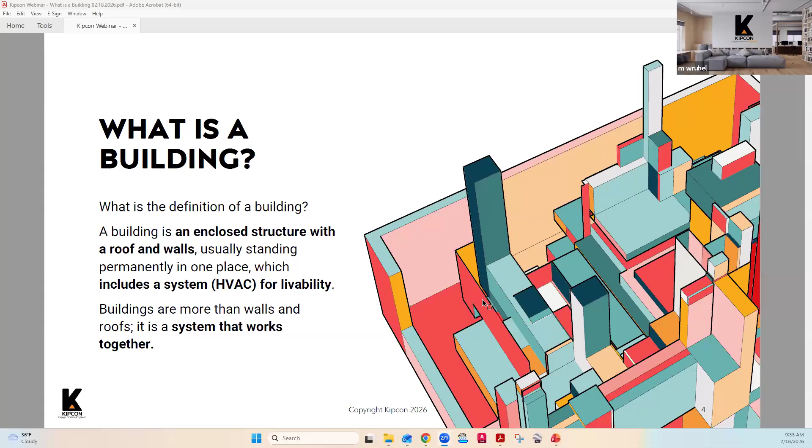Humans have been building buildings of all types for a very long time now. In the modern age, we have modern materials that perform differently. We have ways of conditioning the air in our homes in the past 50 to 100 years or so that are much different than the way we've done things in the past, and there are certain requirements those systems have to run efficiently. The components of the building all work together.

Starting from the bottom, you have a foundation. In this particular picture, this is a section—if you were to take the front facade off of the building and look at what's inside in terms of its actual structure, you'll see there are footings sunk into the soil. There are all different kinds of footings. Some buildings are on piers that go many feet into the ground. Some buildings have basements underneath in which the foundation walls are much larger, and there is a below-grade occupied area or area that can be entered.

In this particular building, there is what would be known as a crawl space. You've got frost footings, meaning the footings extend below grade. Depending on where you are in the country—here in New Jersey and Pennsylvania—you want those frost footings to go at least 3 feet below the ground so they are bearing on soil that is not susceptible to freeze-thaw. Those footings extend above the ground, and then the framed structure is constructed on top of that.

In our example here, we have a wood frame structure, and the exterior walls form the basis for the structural components of that building. Sometimes, based on the building configuration, there may be load-bearing walls inside that structure that you can't get rid of—they're part of what holds up the structure. The roof is also structural in that it's framed out in such a way to hold that shape. Some buildings have flat roofs, and there are structures under those roofs as well that are load-bearing, intended to hold up the structure.

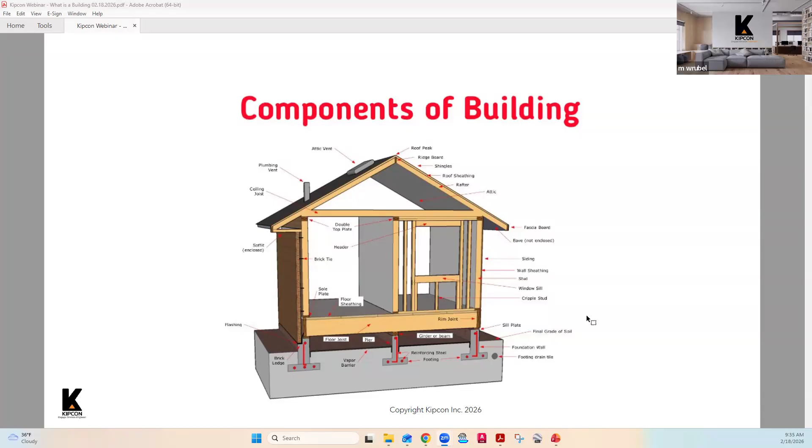So let's talk about the different materials used in modern building and how they age.

When we're first constructing a building, especially in this day and age, we are selecting materials that are going to give us the strength we need for the support structure within the building or within the building envelope. The non-bearing materials, we want to select based on their performance and on their cost.

Clearly there are materials such as real stone, materials like that. They're very, very strong, but they're not very cost effective in terms of affordability for constructing a building.

So we use materials that are going to perform and give us, hopefully, if we protect them correctly, continued performance for decades. In wood framing, steel framing, there are certain types of sheathing systems nowadays with materials that are integrated so there's an ease of construction and a cost savings there, but they also, when constructed properly, perform to keep moisture and other types of aging actions on the building materials out. So they're strong, they're performative, and they are cost effective.

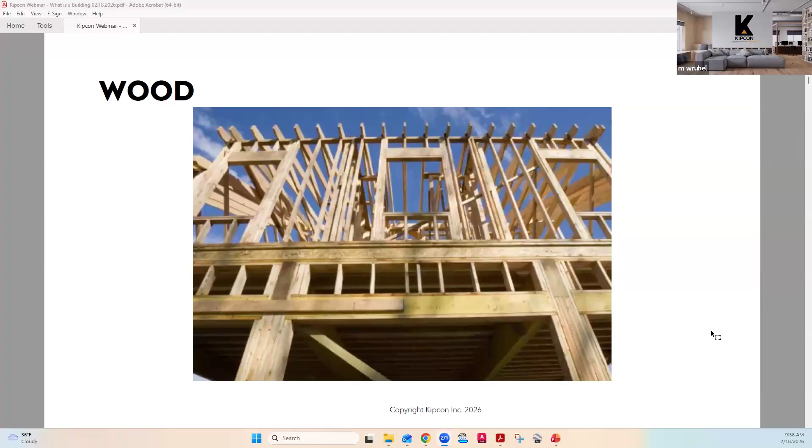Let's talk about the different types of building materials and how they can be affected. As I mentioned before, many buildings are wood frame construction. Sometimes they are on a footing foundation, like we saw in the previous slide. Sometimes, for mid-rise buildings of just a few stories, wood frame is built on top of a concrete podium deck. You see that often with buildings that are mixed use with commercial or have a parking garage underneath. But the wood frame construction can be susceptible to certain types of aging.

One of them is rot. When water is allowed to get to the wood framing materials - wood is a natural material, it is biodegradable. It can last for many, many years when it's protected under the right conditions. But once moisture gets to it and begins to soften the wood, fungus that's naturally in the air around us gets to that wood and will actually start to eat and degrade that wood for our purposes.

So we will often see, when we do invasive testing, that maybe there's water getting in there. We've done moisture testing and can tell that water is getting in behind the facade. We will often recommend that invasive testing be performed so we could see what's going on behind those facade materials. So we'll take the facade off, we'll take the sheathing off, we'll look at the framing, and sometimes if there is water that has gotten to those materials, we will see this type of rot.

Sometimes it can be repaired in place with certain types of repair materials. Rot Doctor comes to mind. It's a material that can be used to kind of create a faux wood and reform the component in place.

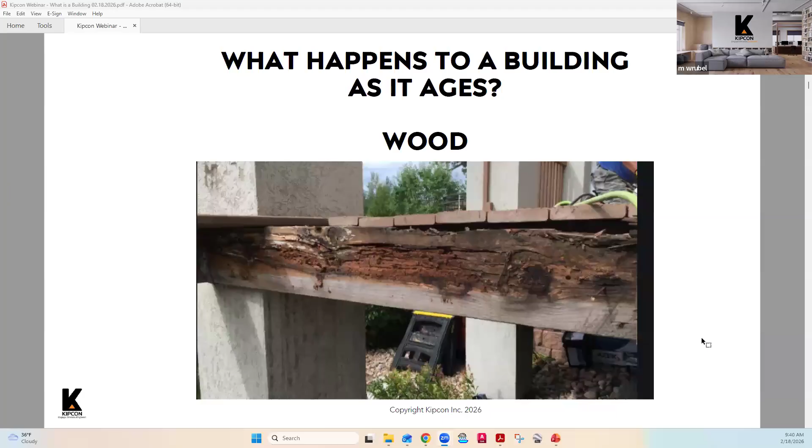That cannot always be done. So like this particular piece right here, we will often take a screwdriver and you can put the screwdriver several inches into that wood. That wood would be very far gone and you'd need to replace that.

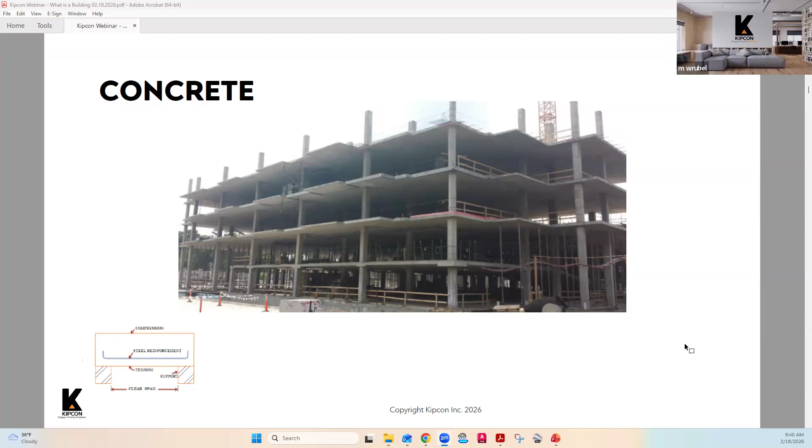We're going to look at steel in a little bit and how it affects concrete. That steel reinforcement in the concrete can, just like wood, once water starts to get to it - you've seen how, when metal comes in contact with water, it begins to rust. And when steel rusts, it actually expands.

When you combine steel inside a concrete component, you're creating a component that's very good in compression, but also can pick up tensile forces applied to those components. It's very useful, but you have to protect it because once you get cracks, concrete cracks very easily—it has almost zero strength in tension.

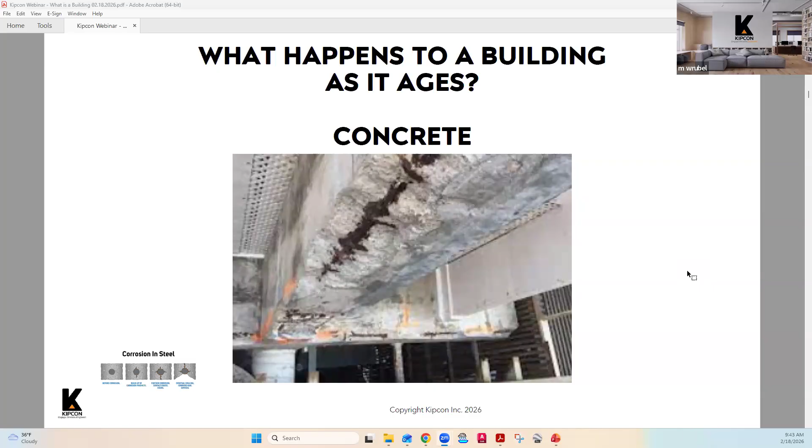Whenever there are areas like along the bottom of a beam where there are more tensile forces than the top, you'll often see concrete start to form hairline cracks at the bottom, and that can happen over time. That needs to be maintained, because once moisture migrates into those cracks and contacts the steel, the steel starts to rust. As steel rusts, it expands and pushes the concrete off the outside of that component. That's why you can see bare, rusted steel inside a component that's deteriorating.

Steel itself—we often have buildings constructed of various steel shapes that form the load-bearing structure of a building. Steel that is exposed to the elements, specifically moisture, will begin to rust.

Oftentimes, when a building is being constructed and you see the steel being delivered to the site, you'll notice those steel pieces often aren't shiny. They have what's called a protective rust on them—you can often see this in street catch basins, the steel grate on top. When they're brand new, they look rusty, but they're absolutely fine; they have a protective rust coating on them.

When steel is used in a building and it's going to be exposed, not inside a building structure—in this case we have what looks to be a parking garage, we can see the line striping there—these steel members are exposed within the parking garage.

They'll sometimes be coated with a protective material to protect them from the elements, especially in areas near the ocean where there's also the action of salted moisture, which is particularly corrosive to steel. So whenever there's exposed steel in a finished building, it will be coated in some way.

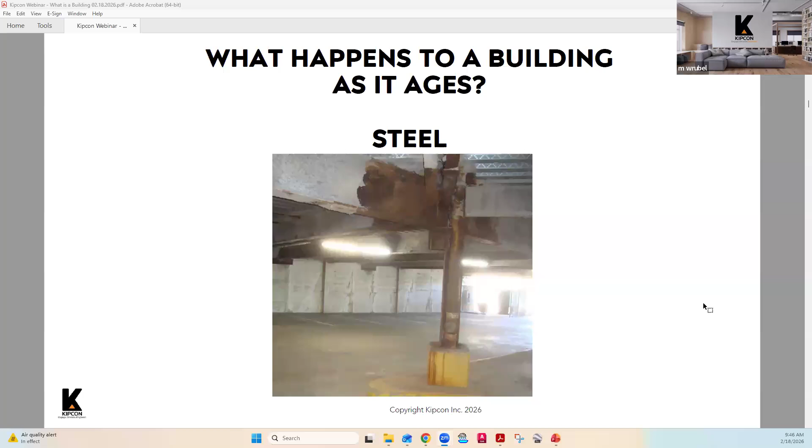There are other types of construction where the masonry is still not the structural component, but it's attached to the structural component on the inside, with a little airspace behind the brick. In older buildings, that air pocket actually has an insulating quality. In modern buildings, we have different ways of insulating with different materials now. However, that air gap between the brick and what's behind it also allows moisture to drain out.

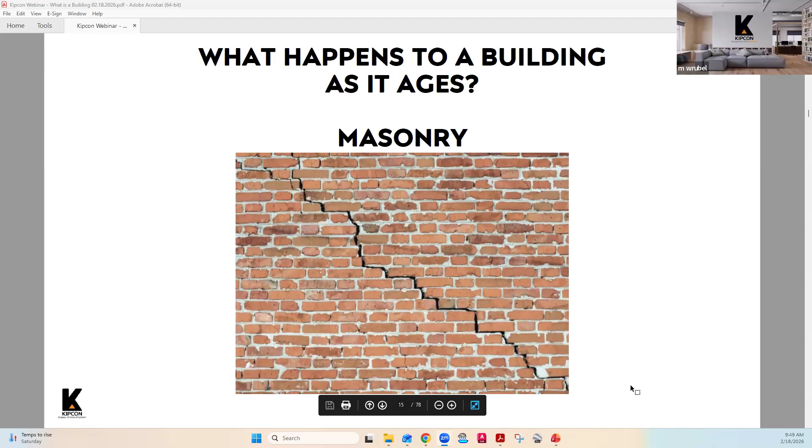Sometimes on newer brick structures, you may see a diagonal or step crack emanating from perhaps the top corner or bottom corner of a window. You may see some vertical cracking in the brick in various locations. That is indicative of a different type of deficiency. I won't get into that here, but I just want to differentiate between cracking in older buildings that have been standing for many years and cracking in newer construction. They can be from very different causes.

As I mentioned earlier, we condition the spaces in our buildings. We have many modern comforts now. We don't have to rely on open flames in our homes, or opening the windows and hoping for a nice stiff breeze in the summer. We're able to very accurately control the air conditions in our home through HVAC systems.

As you can see here from the slide, HVAC stands for heating, ventilating, and air conditioning. Modern HVAC systems can heat and cool spaces. There are different types of HVAC systems, which I won't get into here, but briefly, in a home or in many of your clubhouses, you have what's called a split system, in which you may have an air handler, as shown here, in the attic or in a utility closet.

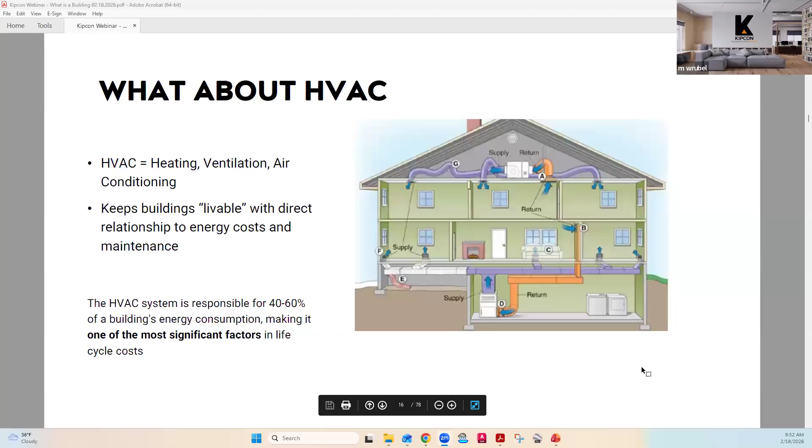This presentation is geared more toward people who are not engineers. Engineers are trained to look for evidence of things going on that may not necessarily be visually observable. I want to give the caveat that we do not have a crystal ball, so we can't look at something and know exactly what's going on inside a building. But we know through experience that if certain things are happening on the exterior, chances are something not good is going on inside—moisture getting in—and we have ways of investigating that, some invasive, some not invasive.

As a non-engineer, you can only see what you can see. I'm going to show you what to look for visually to see how aging, moisture, or other types of impacts can affect the common elements.

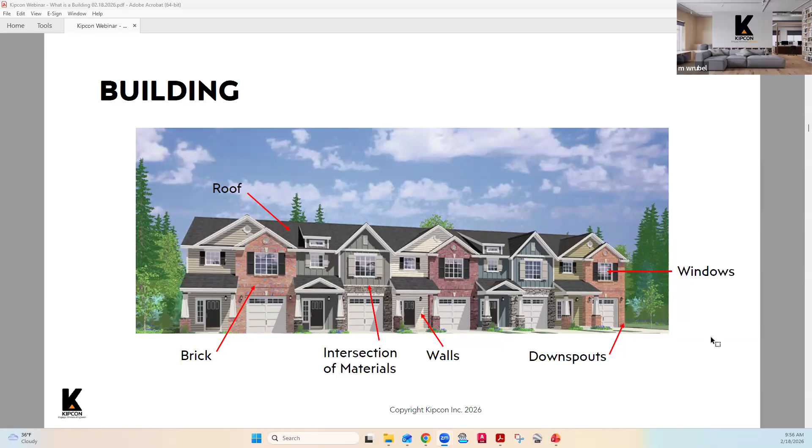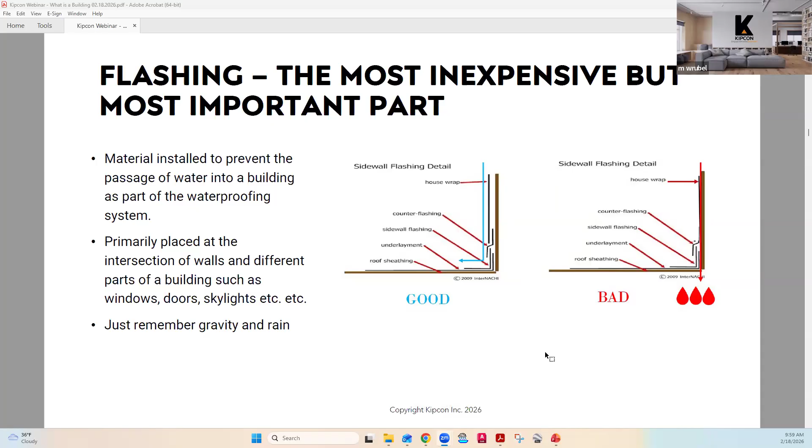So that last point is very good. Just think about gravity and rain. Rain rolls down - you don't want it to roll behind something, you want it to roll over top onto the next layer that's there.

It looks like in this particular picture there were perhaps drips coming down the wall, so that water is migrating from somewhere else. Ruling out the neighbor above having a toilet leak or faulty bathtub or plumbing issue, this water is most likely coming from outside. Leaks can migrate to the interior of the building from outside - I have seen outside facades that were deficient, letting water in, and that water was migrating a room or two into the interior of the home. It looks like there's an interior leak, but it's not - it's water migrating from the outside.

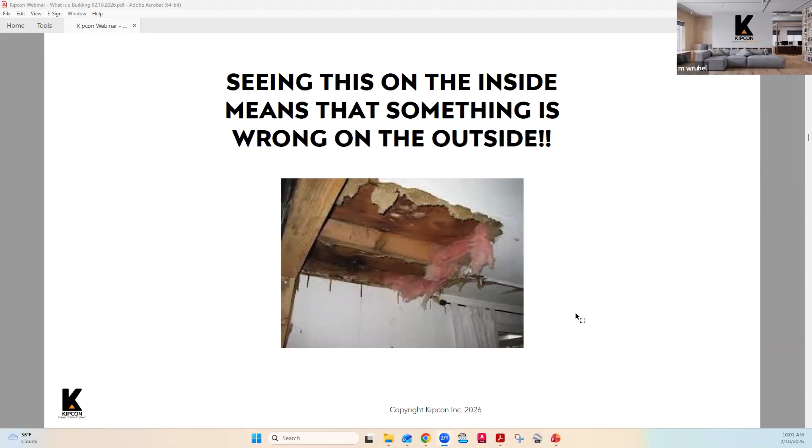Water on the way in will do a lot of damage. So when we're doing invasive testing, we'll often start with some moisture testing - poking holes through the mortar or materials to get down to the sheathing and take a moisture reading. Depending on that reading, we get an idea of the level of moisture entering behind the facade. Above a certain percentage, we know the wood is at least getting wet on a regular basis. Above 30% moisture, we know there's actually free water sitting in there - if we open the building we're going to see water, and if we touch it, our hand is going to get wet. It can happen - I have seen it.

In this particular case, there was likely an invasive investigation done. This looks like perhaps a structural portion of the building that projects farther out from the facade. It looks like there was water getting in there - invasive inspection was done, and you can see that this sheathing is rotted away at the exterior, with the framing members visible on the inside. Now, when we do an invasive inspection, we're opening up one portion, but in order to find out where that water is coming from, we often have to expand that investigation and keep taking off portions of the outside of the building to figure out where that water is entering. Sometimes it's easy, sometimes it's not so easy.

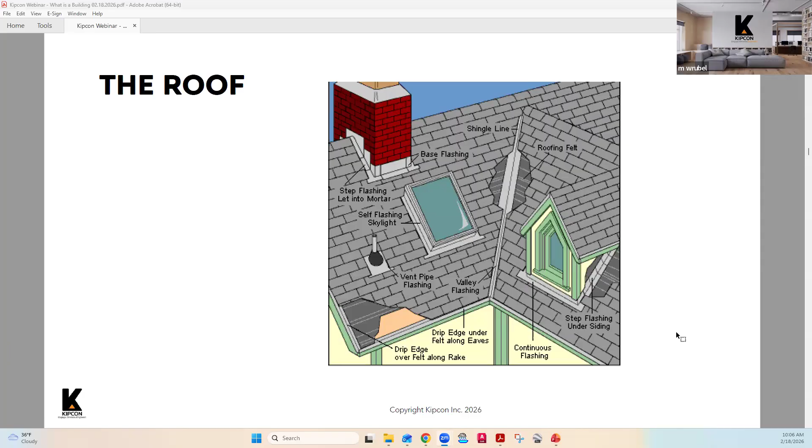There are flashings, just like on a building facade, wherever there's an intersection or a penetration. That would happen at dormer windows, chimneys, skylights, anything that comes up through the roof. Oftentimes on a flat roof, there are conduits that come up for the cooling units that sit on that roof. They all need to be protected somehow. And then on roofs, there's drip edge at the eaves and at the rakes to shed that water and make sure it's coming off the roof, not migrating under the shingles at the edge.

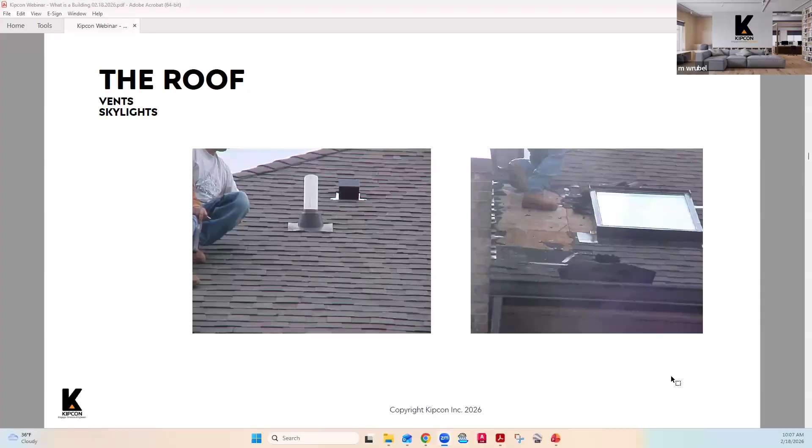On the right-hand side, I am assuming this is being taken apart because there was water coming into the skylight. It was likely not lapped properly with the shingles, and water got into the penetration where the frame for that roof, or where that skylight, comes through the roof.

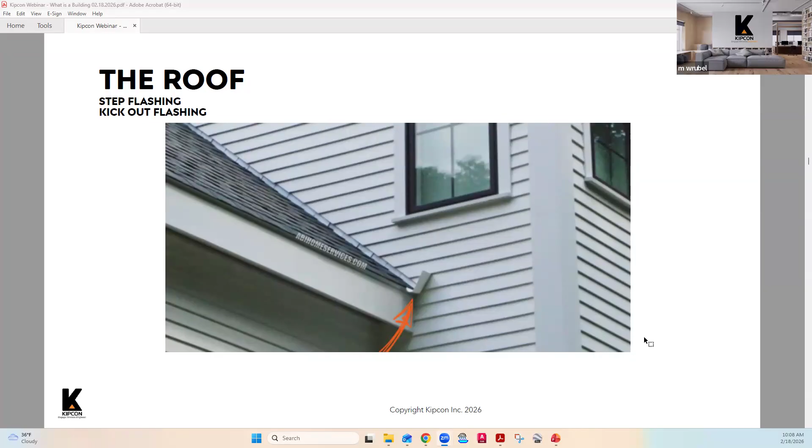It's protecting the sheathing on the exterior of the building and the roof sheathing with those pieces of metal. Those pieces are lapped with the shingles - it's not one continuous piece in that roof valley. It's lapped with the shingles so that as water rolls down, it continues down the roof, does not get under the shingles, and eventually comes down and hits that kick out flashing. The purpose of the kick out flashing is to keep the water from continuing to roll down the facade, so it's doing what its name says - kicking the water out and away from the building. Very important piece of flashing in this particular location.

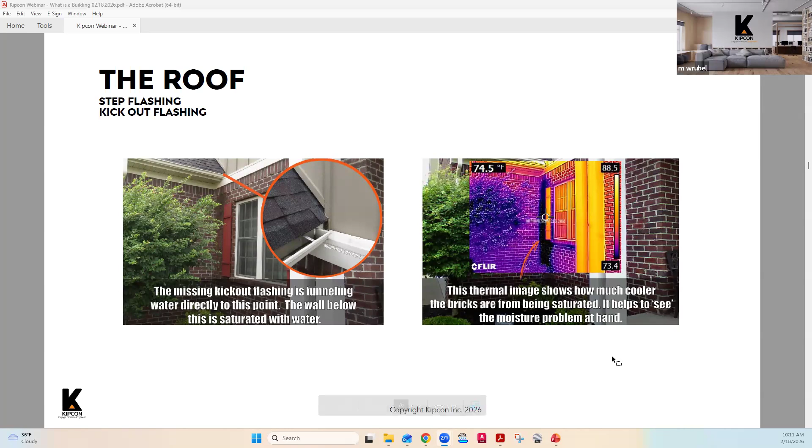In this case, you can see that it's cooler, and we can see there's no kick-out flashing. This is probably an area of interest because of the way it's configured, and you can see there's a little bit of a problem there. So what we would do is probably some moisture testing to see what's going on. If there's an indication of a problem, we may recommend some invasive testing to see if there's actual damage, depending upon the results of the moisture testing.

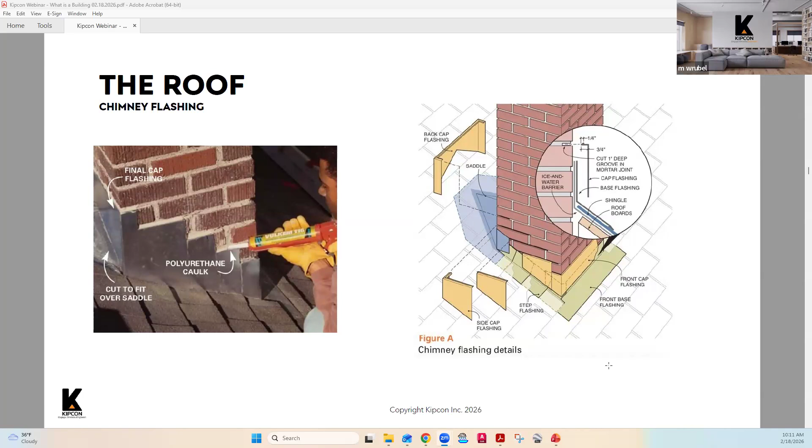The roof again - I'll move a little more quickly here so we don't run out of time. Same thing: you want to protect it at the chimney just like you would at a vertical facade. Make sure everything is lapped correctly and caulked. You'll see this is being caulked here, and that caulk needs to be maintained as part of regular maintenance to protect against water getting into this assembly.

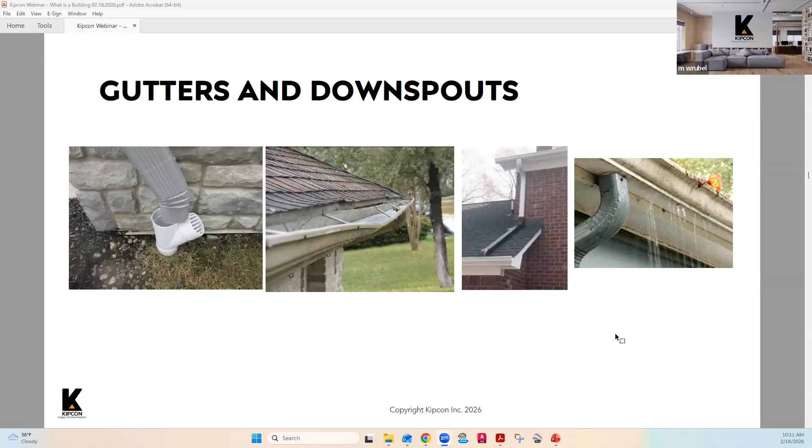Gutters and downspouts - I touched on them earlier, so I won't go over them again. Maintenance is very, very important, making sure that if you have a subsurface system, it's functioning properly and connected to the downspouts correctly. You want to make sure this is maintained.

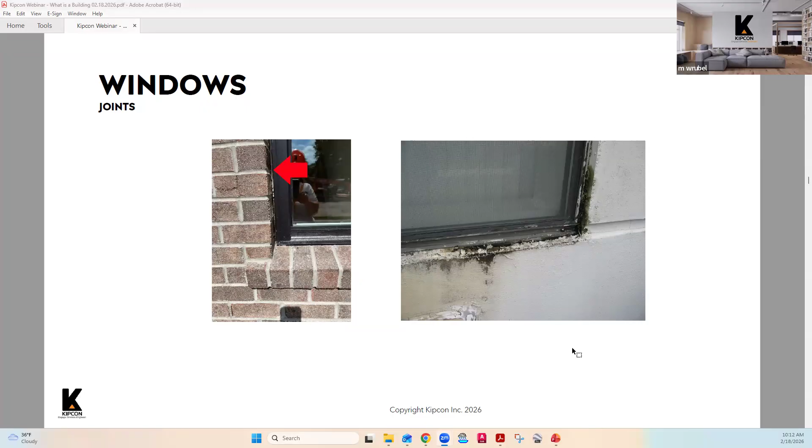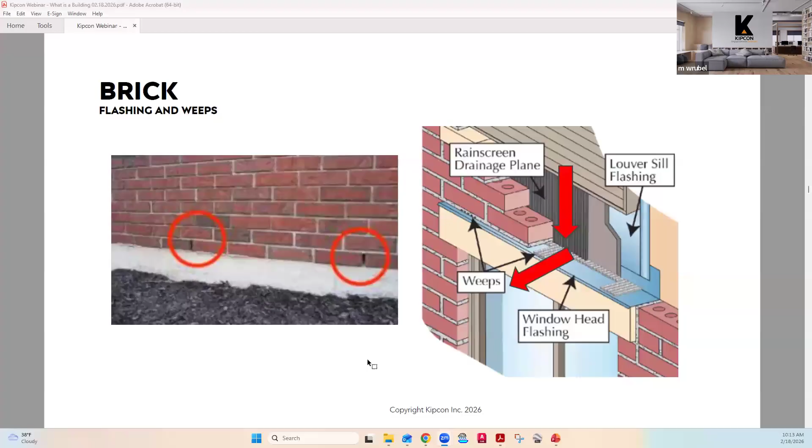I'll go to brick weeps. We talked earlier about rain screens and air pockets behind the brick facade. Often if you have an airspace behind that brick facade, there will be weep holes, or in this case a mortar space left open to allow any excess moisture behind there to come out. Even with a rain screen, there'll be a drainage plane behind there. You want to make sure that wherever the brick terminates above something - whether it's the foundation, a window, a door, or a roof - there's flashing and some sort of moisture control so that moisture accumulated behind that facade can exit.

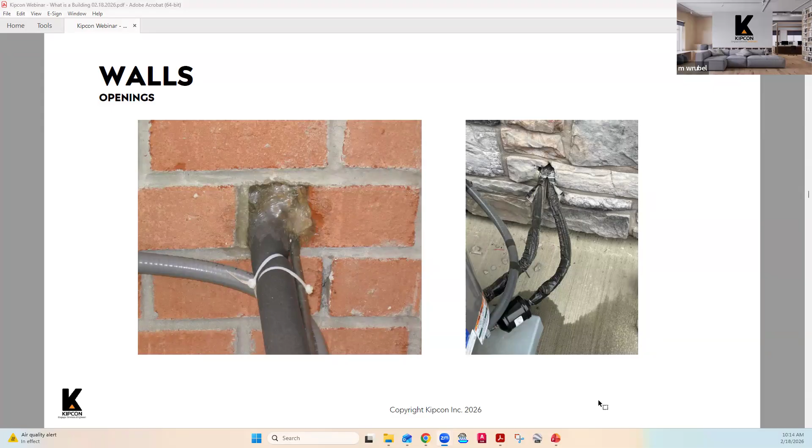Any sort of penetration, including conduits or anything like that, you want to make sure those are sealed. There's a way to flash penetrations at the exterior. If you have any kind of masonry exterior, you want to see those penetrations sealed with a material that can expand and contract. A lot of times I see these areas just grouted shut, and that grout will eventually deteriorate. It's best to seal those areas with an elastomeric type of material that can expand and contract, so that whether it's hot or cold out, that area is protected.

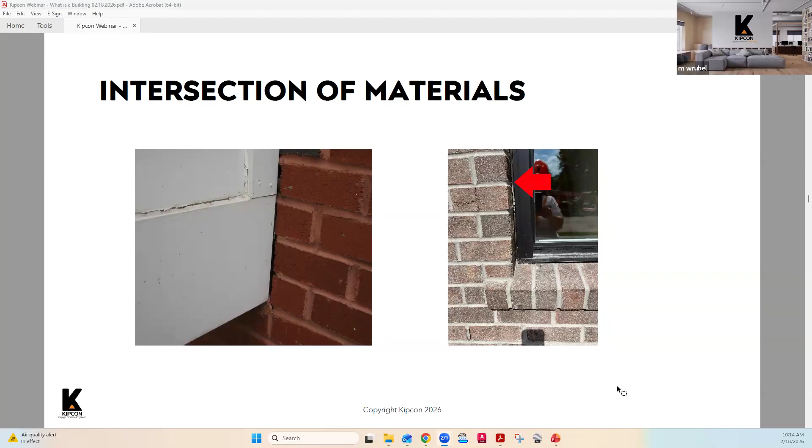Intersection of dissimilar materials, I talked about this. In this case, we have what looks like an AZEK exterior facade on the left that meets the brick facade. You want to make sure that area is caulked, because materials expand and contract differently, they'll have different movements under different temperatures, and a crack can form there. You want to make sure these materials are properly caulked. On the right, we see between an aluminum window frame and a masonry exterior, this needs to be caulked too. It needs to be maintained as part of regular maintenance to ensure it performs over time.

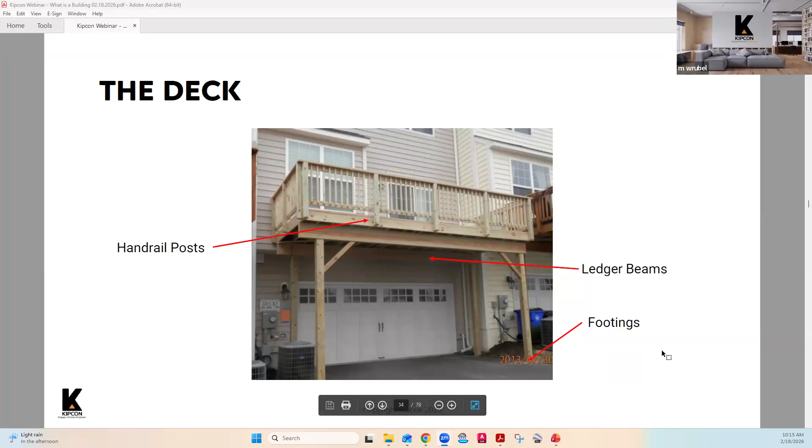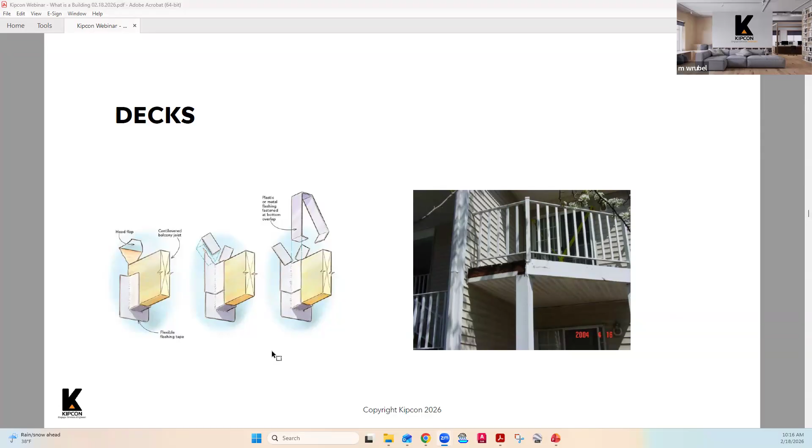I won't get too much into decks here just for the sake of time, I'm more than happy to discuss that with you offline. Again, wherever a deck component penetrates the facade, it needs to be flashed properly. There is a proper flashing method, usually specified by the manufacturer of either a manufactured sheathing material or the house wrap material, that talks about how things need to be flashed when there's a structural penetration through the facade.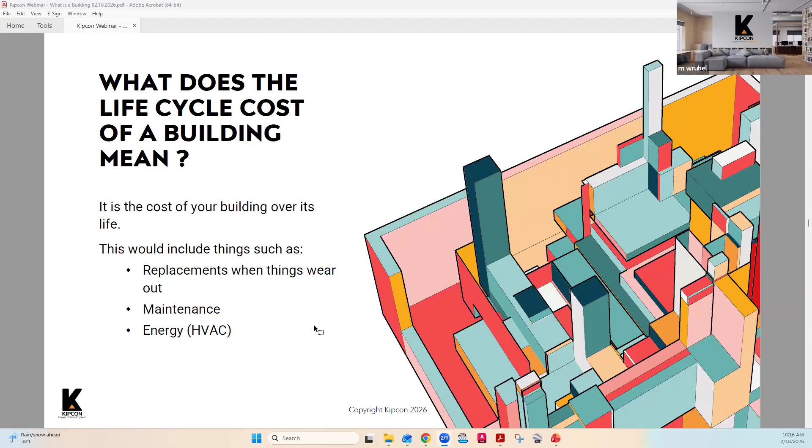So let's talk about costs and preventive maintenance. Obviously things wear out, everything has a useful life, things need to be replaced over time. So there is a cost, as I touched on earlier, to living in your house, and there's a cost to maintaining the building your business is in. There are also long-term costs, life cycle costs. It's the cost to continually replace and maintain those items as the building ages.

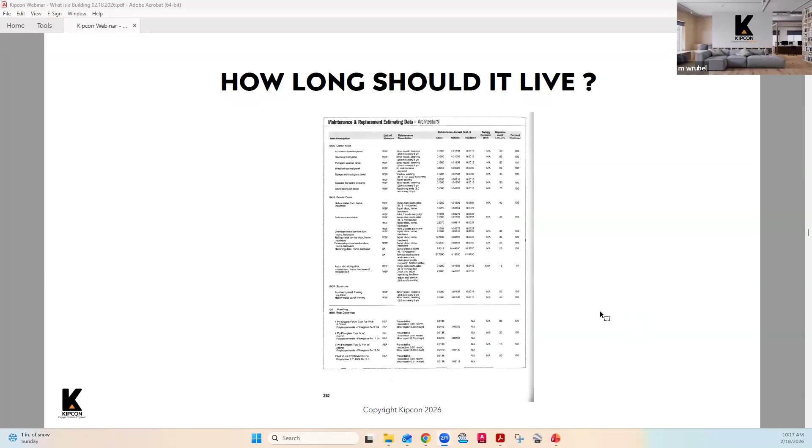HVAC systems are integral to the air conditioning and health of our buildings, making sure pipes don't freeze and, in some cases, controlling moisture levels within the building, which can extend the life of certain components. Older HVAC systems are relatively inefficient depending on how old they are, while newer systems can be more efficient. The performance of your HVAC system is also dependent on the health and performance of your building envelope's materials. If you are leaking heat from the windows, you could have the best HVAC system in the world, but it won't be as effective.

So when we're looking at a building with an older HVAC system, it's time to replace that system. Going with a more efficient system and making upgrades to the building to work in conjunction with it may have a more expensive upfront cost. But over time, the life cycle cost of doing those upgrades and using that more efficient HVAC system will even out. You'll eventually reach a break-even point where, even though the upgrade has a larger upfront cost, over time the cost of maintaining that system and your energy costs, even though they're not tangible in the building, are part of the cost of running a building.

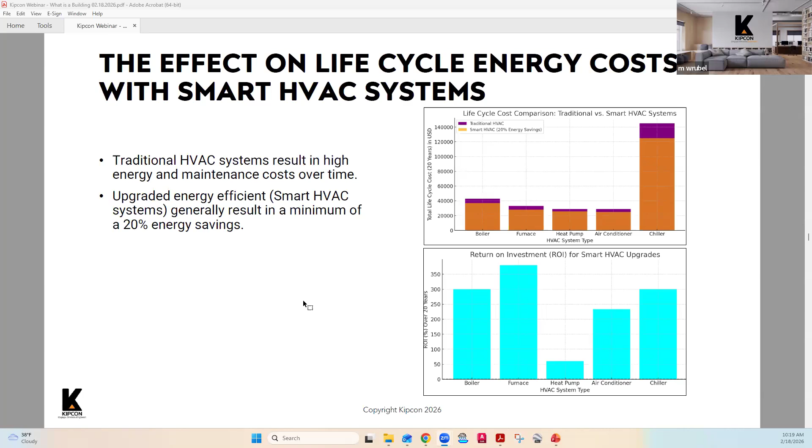When you look at those life cycle costs over time, you will see that because that system is more efficient, it's saving you money over time. There's a point at which your return on investment for installing that more efficient system reaches a break-even point and starts to exceed the performance of the former system.

So slowing down the aging process, the only way to do that is maintenance. There are different types of maintenance, and you want to do preventive maintenance—keep the maintenance in that realm. Preventive maintenance is sort of like maintaining your health: eating healthy food, getting exercise. These are preventive measures against any kind of disease or deterioration in your body. The same thing applies with preventive maintenance for a building—you are trying to avoid the things that will cause damage.

As we move on to the next level is corrective maintenance. So the damage has already happened. Sometimes you can do all kinds of maintenance and things still age—the physical world still tends toward chaos, and things deteriorate. So at some point you will need to replace that item, or you may need to repair a component. At this point, the deterioration has taken place.

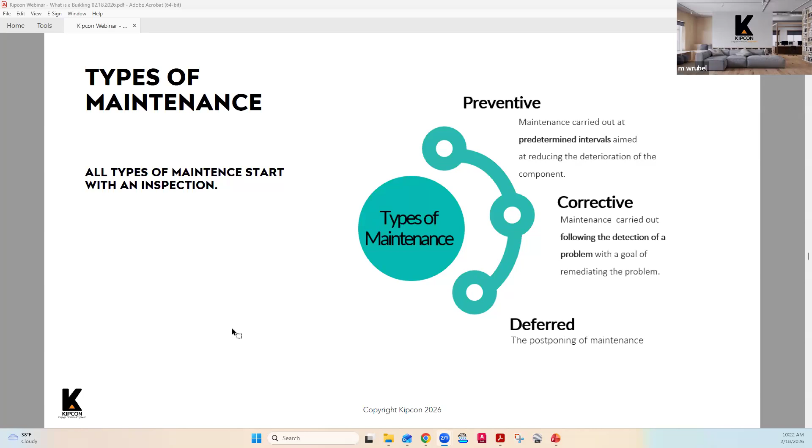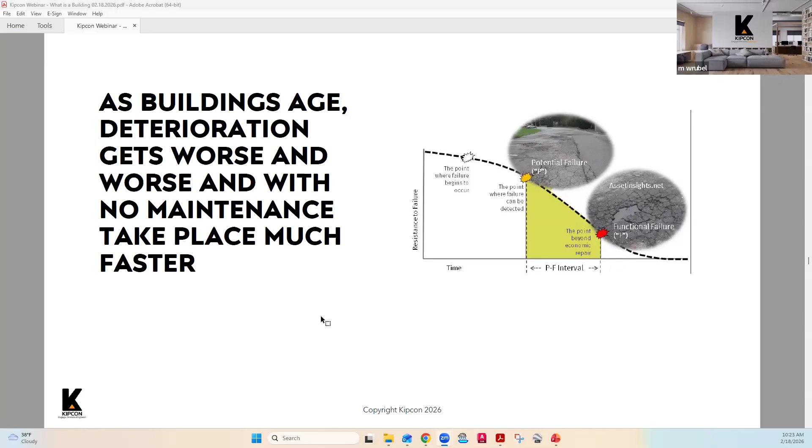In the spirit of preventive versus corrective maintenance, there's a point at which you can look at a component and see we need to maintain this—whether it's the caulk around the windows. This case isn't a building, it's a roadway, but we can see that the roadway is starting to deteriorate. This picture is actually into corrective maintenance territory, but you understand the idea: as your pavement ages, you want to seal cracks and do that preventive maintenance so you don't get to functional failure down the road. As you can see here, these materials are no longer performing—you can no longer maintain them in any reasonable, cost-effective fashion that's going to do any good. So you want to keep things in the preventive maintenance category and try to extend or even reach that estimated full useful life of that component.

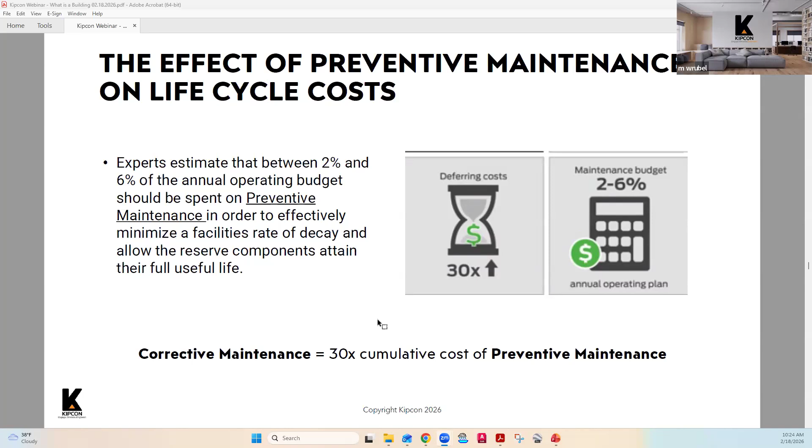One of the important takeaways here is that in your reserve study, you have a total cost to replace your components. Preventive maintenance over time tends to be about 2 to 6% of that annual operating budget—just historically, from collected data. Spending that 2 to 6% on preventive maintenance can avoid much more expensive costs down the road. It was found that the cost to perform corrective maintenance on something that's deteriorated because it hasn't been maintained is 30 times the cost of that initial preventive maintenance. That highlights the importance of preventive maintenance on your buildings.

Obviously, not maintaining your building will make it age faster, but there are also other considerations. If you live along the coast, there's salt water, high winds, extremes of temperature. Oftentimes you'll see on the south side of a building where the roof gets baked off much more quickly than the north side because of temperature fluctuations. And exposure to the elements—cold, snow loads, high winds, wind-driven rain—things of that nature will make those components age faster.

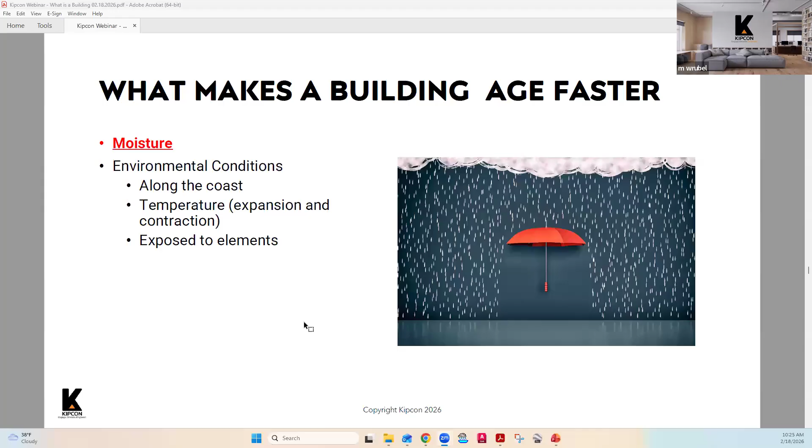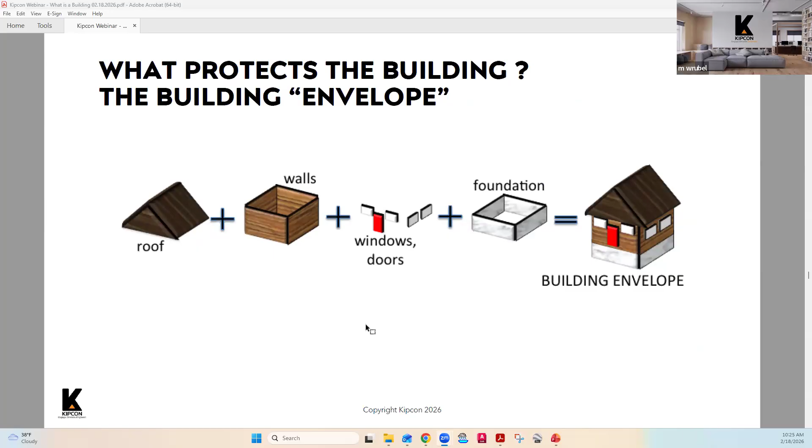Again, we touched on the building envelope. It's those components that you can see physically. You want to make sure they're maintained, they're not deteriorating in any way, because you want those to protect the inside of the building, the components that are holding up the building.

Again, just for the interest of time, I'm just going to go right through to the reserve study portion of this.

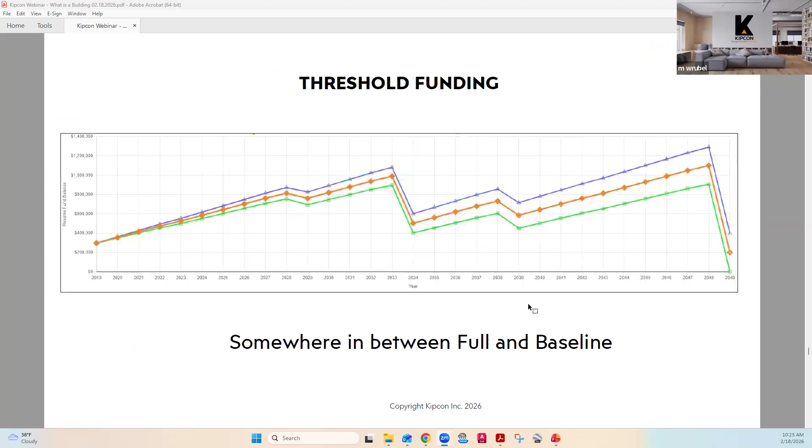should go in front. A preliminary reserve study is done, if you live in a multifamily community, by the developer prior to anything being built. They take the design plans, they do a takeoff from those design plans for the common elements, and put together a reserve study for a community that is not constructed yet.

So that includes somebody going out to the field, doing a condition analysis assessment of all the common elements, and a financial assessment, estimating remaining useful lives, and estimating the cost to replace those, and coming up with different funding scenarios, whether it be baseline, full funding, or threshold funding.

Beyond that, you will need to update the reserve study as the community ages. That can be done in several ways. You want to have an update with a site visit done at least every 3 to 5 years, just to capture those components that are aging, and make sure you're properly funding for the replacement.

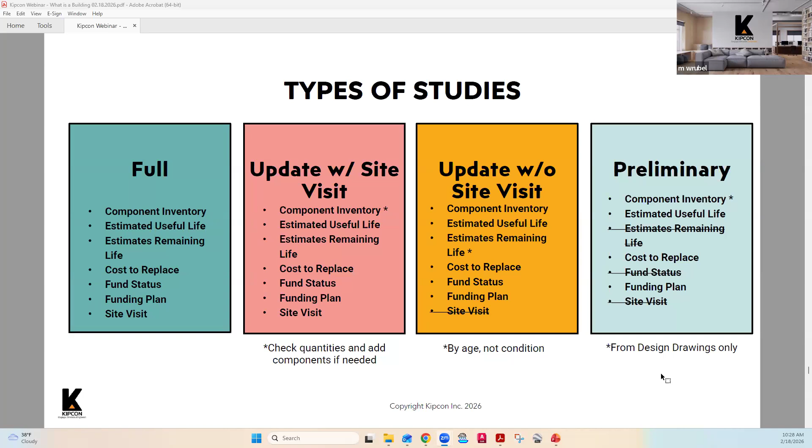In the interim, if you do a remediation project and just want to do what's called a paper update, or an update without a site visit, to see how that project has impacted your reserves, we can do that to see how the budget is impacted without a site visit. But when updating a reserve study, you should always do an update with a site visit, so the condition of those components can be assessed.

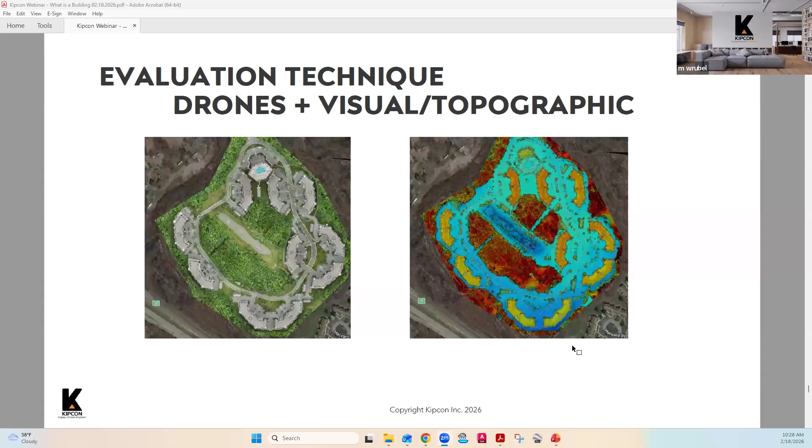Okay, I'm going to stop here. Again, I apologize for the pace, and that I didn't get to cover some things, but I did want to get a chance. We can give you a copy of this presentation that you can look at for yourself. Happy to chat with you offline if you have any concerns. But I wanted to take these last few minutes to see if anyone had any particular questions.

I see one question here: what are the metal lintels below a brick facade, and are they structural? Very good question. Again, the brick facade in a modern building is not part of what's holding up the building, but that exterior facade is integral to the building, and those metal lintels that span the opening, like above a window or door, are very important to the structure of the brick facade itself, to that masonry structure. So yes, if you see metal lintels that are deteriorated in any way, starting to expand, flake, anything like that, you want to have that looked at.

Okay, I have a question here: are you saying our preventive maintenance budget should be 2 to 6% of the 30-year expenditures from our reserve study? I'm not saying it should be necessarily. When a reserve study is done, we look at the needs for preventive maintenance, and it's specific to your community. However, across the board, based on the data available, that preventive maintenance budget typically is 2 to 6% of those 30-year expenditures. I hope that helps. If you have a specific community, you want to look at that as part of your reserve study to make sure you're funding properly.